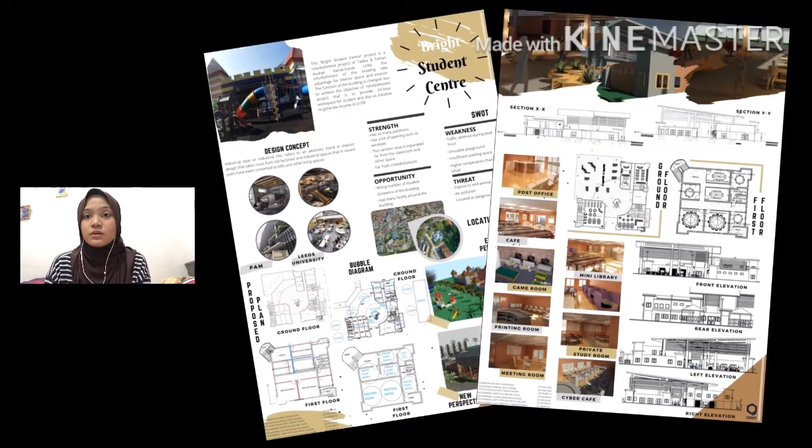Today, we would like to present to you our project refurbishment called Bright Student Center. For this project refurbishment building called Bright Student Center, this is a building made for use of students operating 24 hours. The refurbishment of this building takes advantage of interior and exterior space.

The function of the building is changed due to achieving the objective of the refurbishment project, that is to provide a 24 hours work space for students and also as an initiative to generate income for UiTM.

The spaces proposed in this new building are a meeting room, private study place, outdoor study area, mini library space, PC room, playroom, cafeteria space, print station and gazebo. The method involved for this project is adaptation.

The target market for this Bright Student Center is students, UiTM staff and the public. The location of the building is at UiTM Shah Alam, Selangor. This location is strategic because there are a lot of facilities around the building that can be useful to visitors. The location of the building is complete with access road.

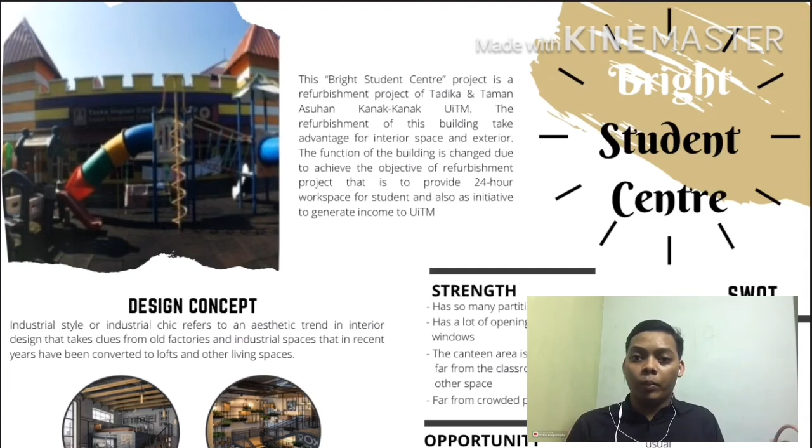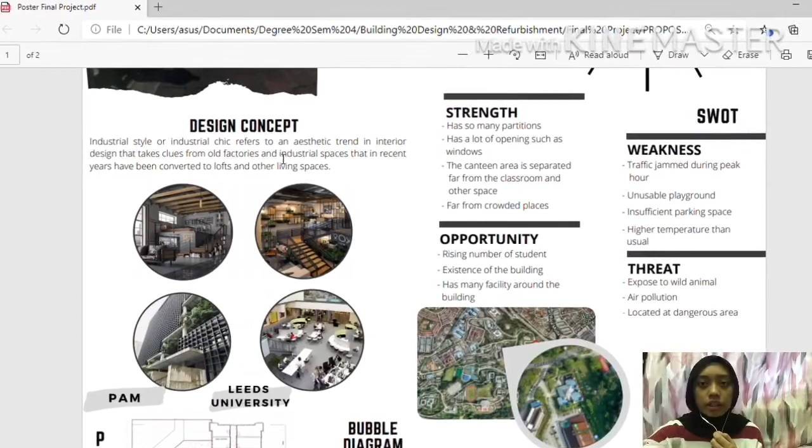Industrial style, or industrial chic, refers to an aesthetic trend in interior design that takes cues from old factories and industrial spaces that in recent years have been converted to lofts and other living spaces. We take the concept of industrial color, which is brown and grey, and we paint and use building material with the same color to comply with the concept.

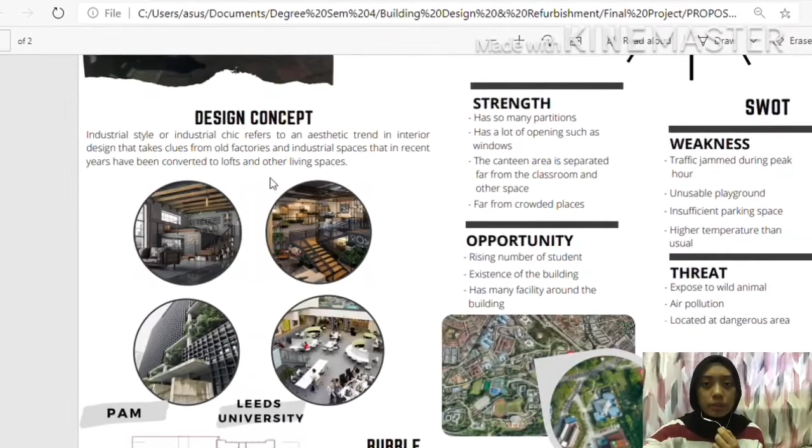For reference of the refurbishment project, we chose two buildings: Pertubuhan Arkitek Malaysia, also known as PAM, and Leeds University. PAM is located at Bangsar and has a GBI Platinum certification, and is one of the famous green buildings in Malaysia.

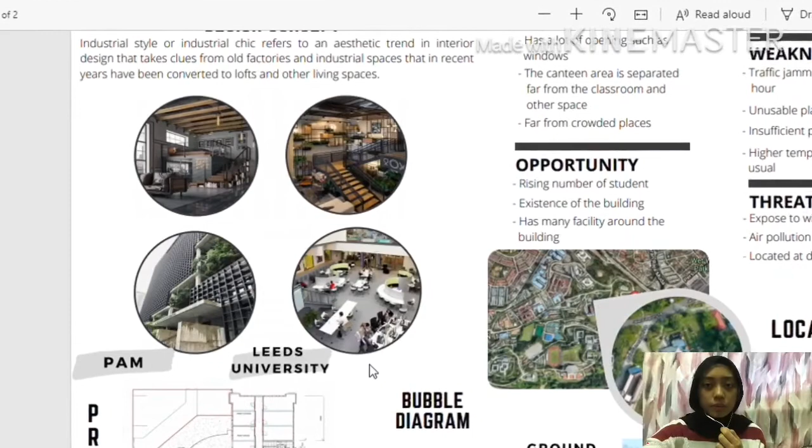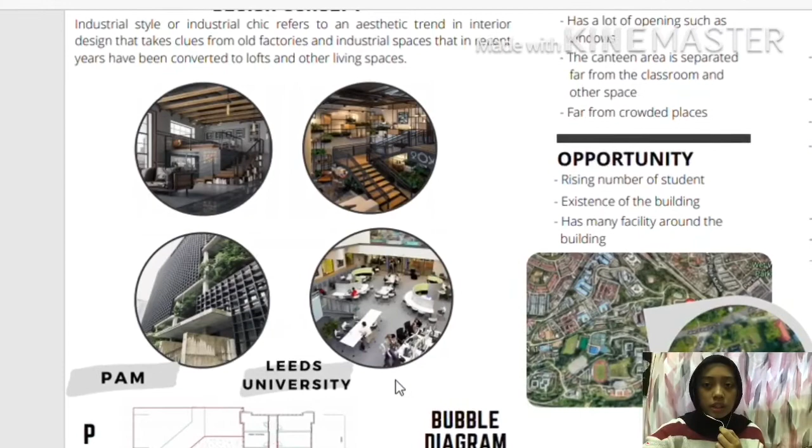Our refurbishment uses some of the GBI concepts of the building, for instance, open space of the building which leads to natural ventilation and natural lighting in the space. Another case study we use is Leeds University, where we focus only on their open space library.

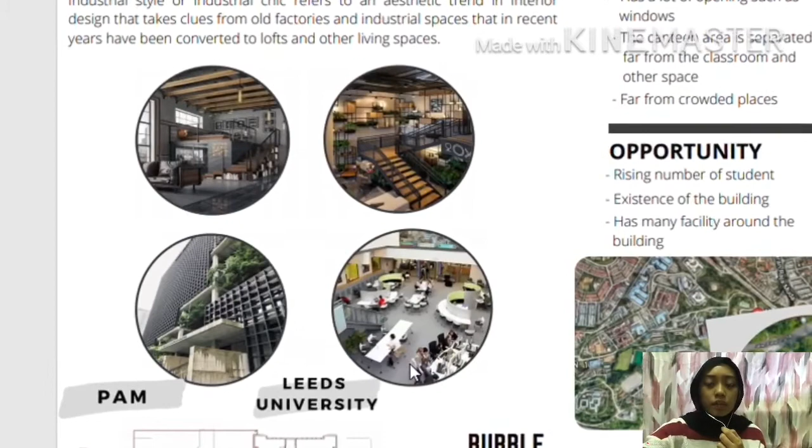Can refer to this photo. We built the outdoor study area at the front of the building to give students fresh air while they are doing their project or studying their course.

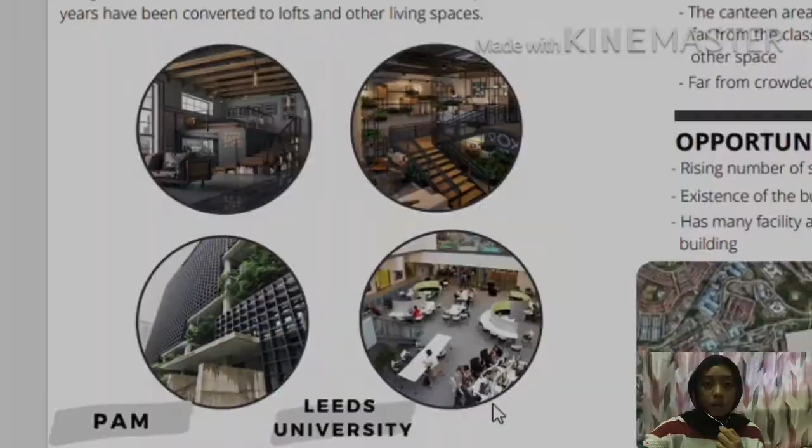So this is the SWOT analysis for this project. First, for the strength, it has so many partitions which create more spaces. Next, it has a lot of openings. And next, the canteen is spread far from the classroom and other spaces.

And lastly, the Tadika is far from crowded places. Second, for the weakness, there is a traffic jam during peak hour around this area. Next, unusable playground. Third, insufficient parking space. And lastly, higher temperature than usual.

For the opportunity, the number of students is increasing, the existence of the building itself, and it has so many facilities around this building. Last but not least, for the threat, the building is located in a dangerous area which is exposed to wild animals and air pollution.

For the proposed plan, demolition work and new work was carried out on the ground floor and first floor. As you can see at ground floor, most new work is more than demolition work. The blue line on the plan indicates demolition work, while the red line on the plan is new work.

Demolition work is done to remove walls to enlarge a space. For example, in the mini library section, after demolishing the wall, the mini library becomes larger. For new work, it is mostly window and door installation.

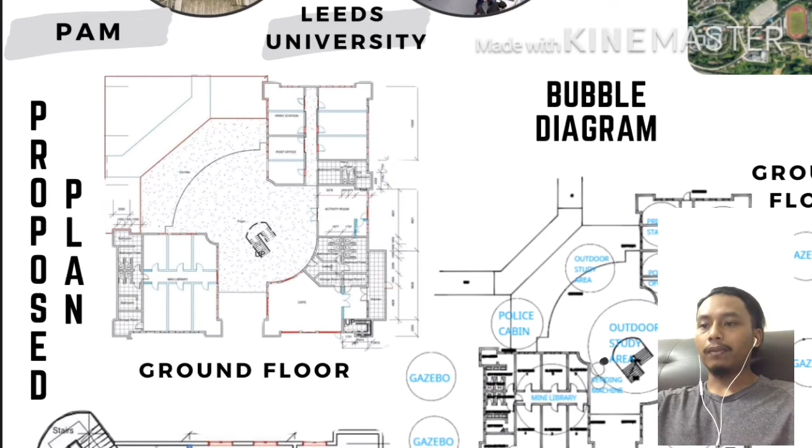For the first floor, the plan shows that demolition work is only carried out in private study rooms 1, 2 and 3. In contrast to the ground floor, new work on the first floor has walls made to add rooms. In new work, there are also windows and doors as shown in this plan.

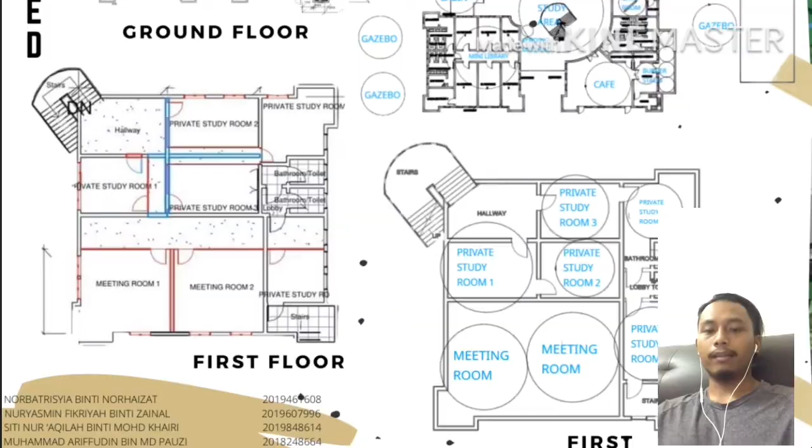So next is the bubble diagram for the student center. This is the bubble diagram for the ground floor. There's the outdoor study area, gazebo, mini library, cafe, print station, cyber cafe, post office, game room and parking area.

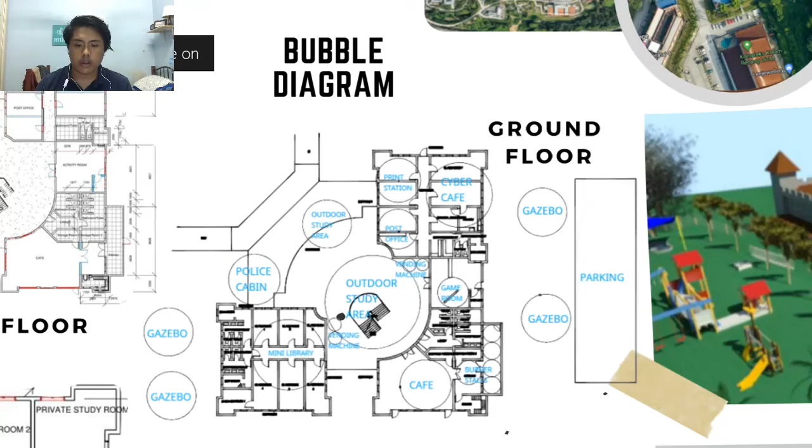For the first floor, the bubble diagram is private study room 1, private study room 2, private study room 3, private study room 4, private study room 5, and meeting room.

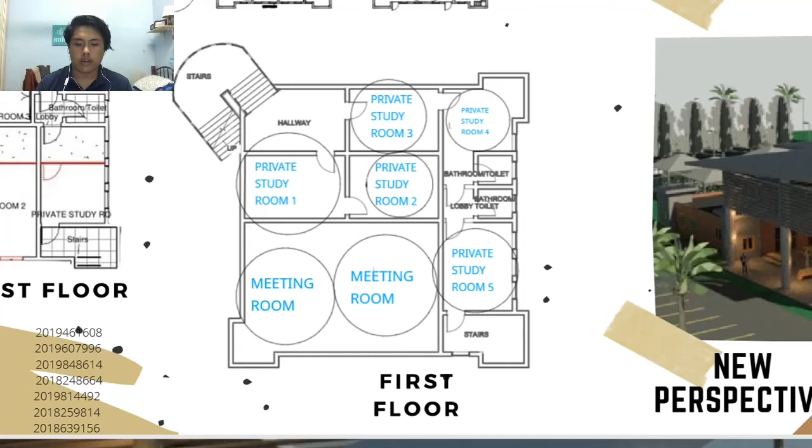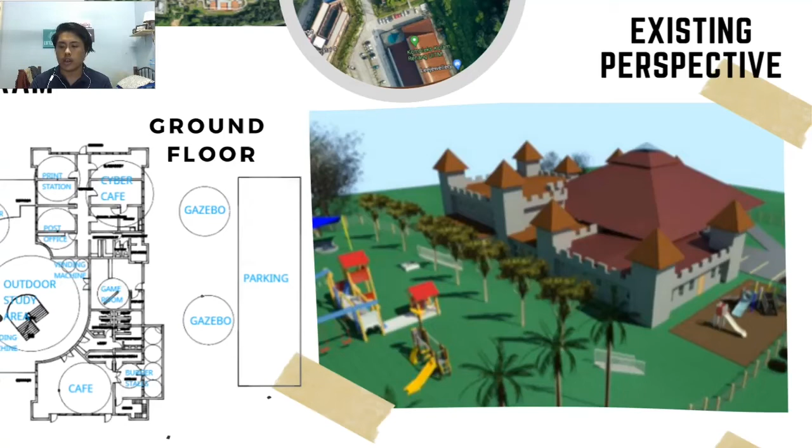Next is the perspective view for Tadika and our proposed project, which is student center. Firstly is the existing perspective for Tadika. As you can see here, this is the building for Tadika, and beside it is the playground.

Next we move to the new perspective for student center. As you can see here, this is the building for student center. The roof has changed and there is shading at the top of the column, and there are more parking areas, and this is the outdoor study area.

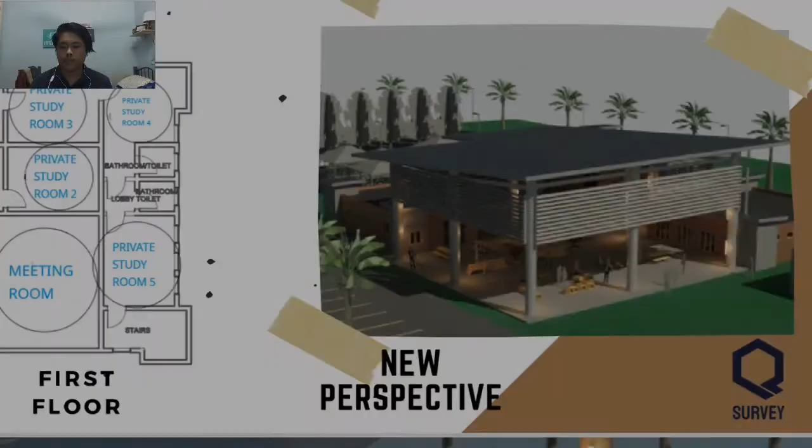I'm going to present all the drawings in our poster. There are 3 parts that consist of 8 different drawings. The first part is the section, second is floor plan, and third is elevation.

In the section part there are two drawings: section XX and section YY. We are more focusing on hatch and foundation. As you can see here, this is hatch in the wall.

Below the ground level there are 2 types of foundation used. The small foundation is used for supporting the column for the building, while the big foundation is to support the column for the foyer.

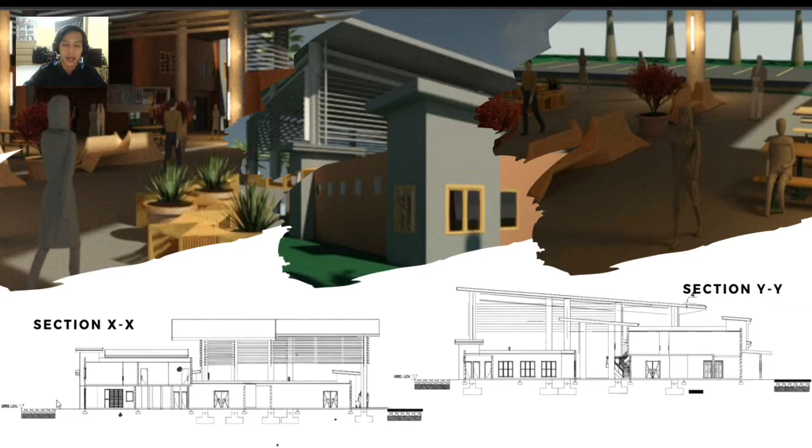Let's move to the next part, floor plan. There are 2 drawings: first is ground floor and first floor plan.

In the ground floor, on the north side, there are 3 rooms: first is cyber cafe, print station, and post office. On the south side, there is a cafe provided.

On the southwest side, there is a mini library. In the large area, we are providing 9 benches for students. In the first floor, we are providing 5 different private study rooms, 2 bathrooms, and 2 large meeting rooms.

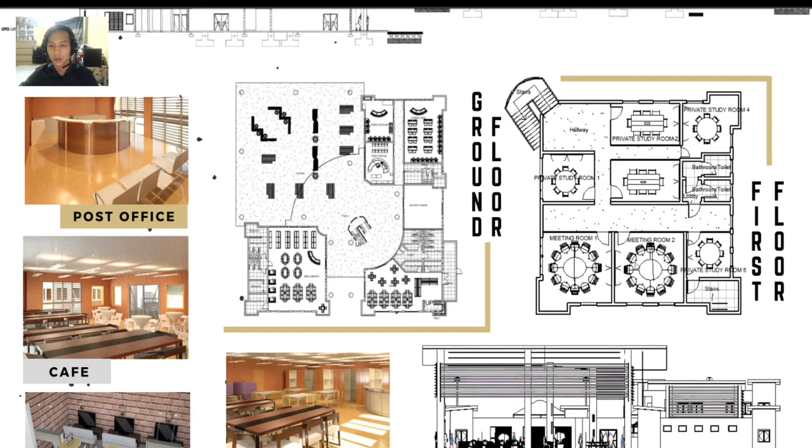In the elevation, as you can see here, this is aluminium horizontal louver. The function of the aluminium horizontal louver is to prevent rainwater, wind with dust, and to protect from direct sunlight in the large area.

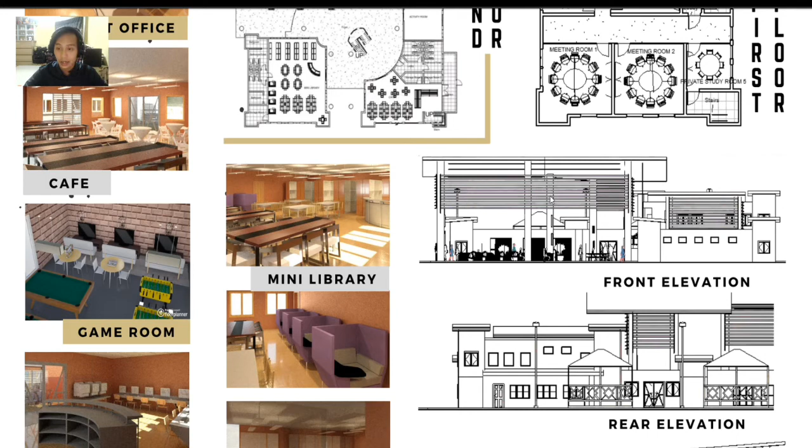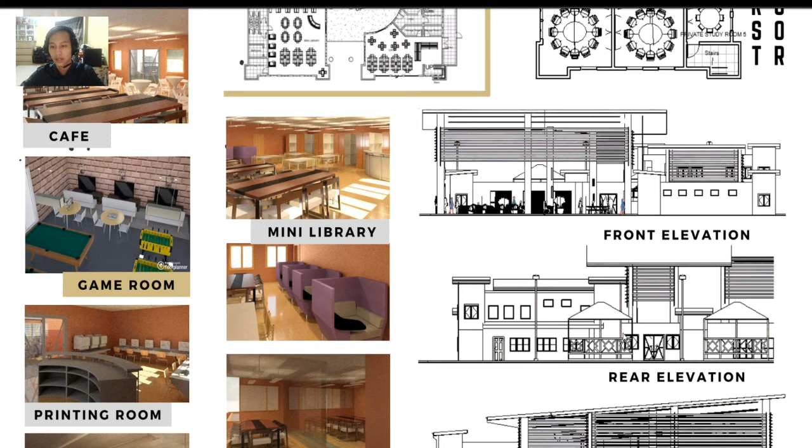In the rear elevation, as you can see here, we are providing 6 gazebos, 2 in the rear and the other 4 in the front. In the left elevation, as you can see, this is the foyer. The degree for the foyer is 4 degrees.

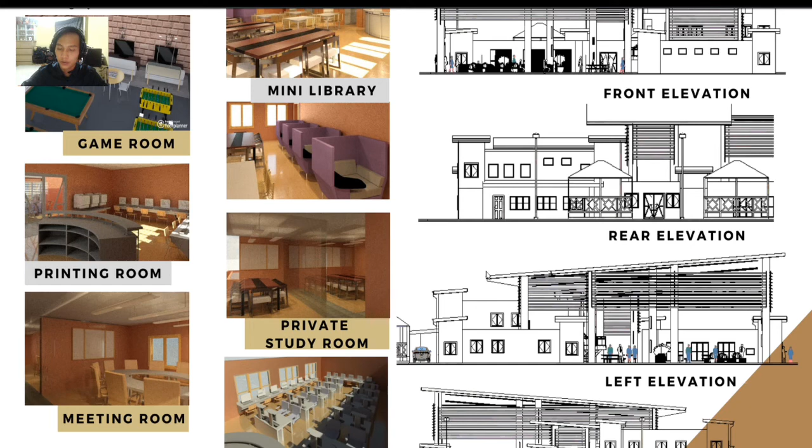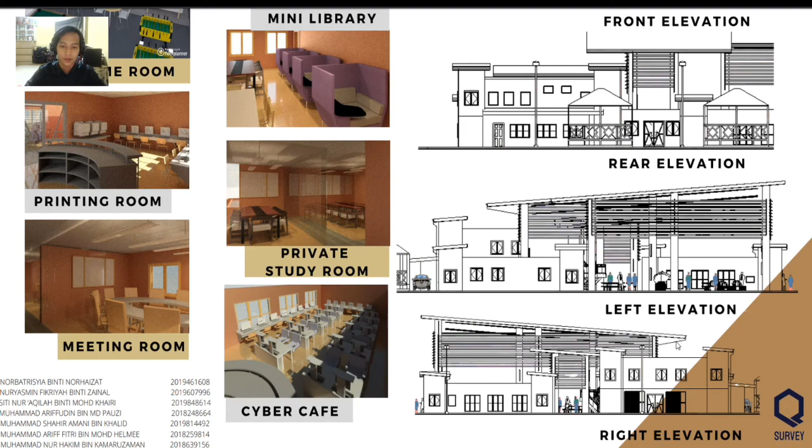Next, we would like to show you our project 3D exterior and interior perspective based on our design concept. For the exterior, this is the exterior of the building, and this is the foyer that includes outdoor study area as you can see here.

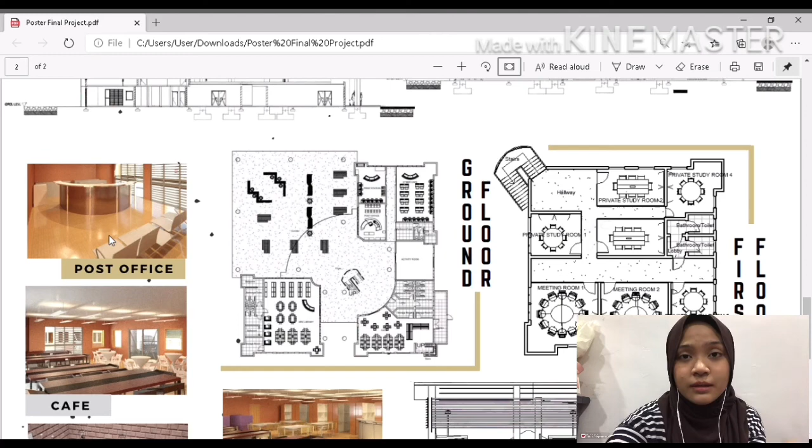As for the interior, this is the post office that will make it easier for students to pick up their package, and this is the cafe where students can take a break after study. Then this is the game room for students to release their stress, and printing room to print their assignments.

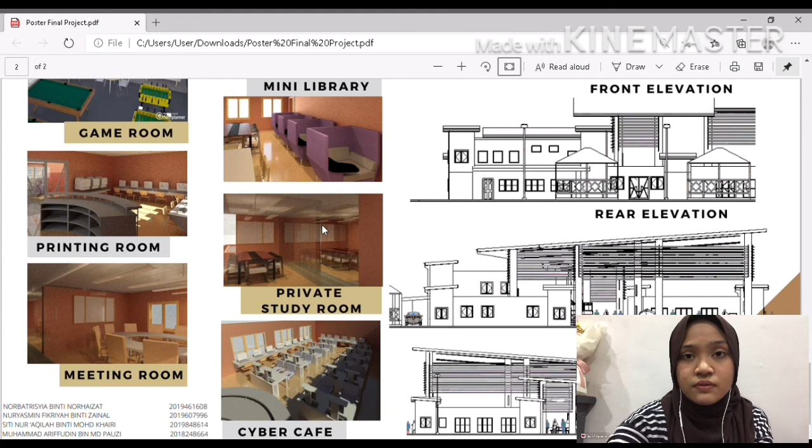It also includes a meeting room and private study room for students to have more privacy for their discussion. And lastly, this is the mini library to find reference, and it also includes private space for students that want to have self-study. So that's all from us, thank you.